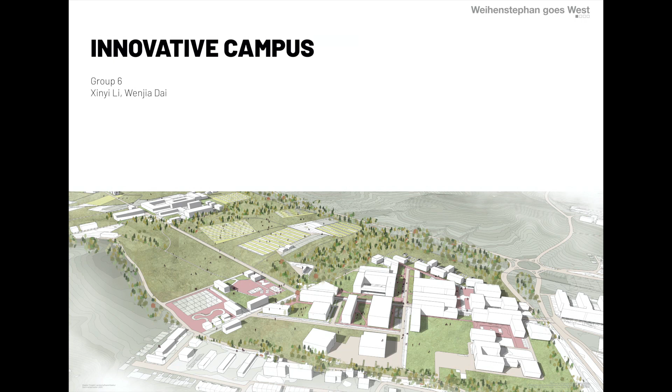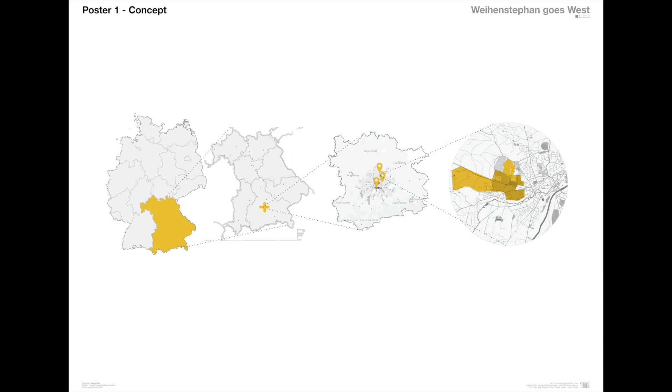The first part is concept. The site is our Weihenstephan campus and its western expansion. Weihenstephan campus is located in the west part of Freising, at the connection between the dense urban settlement and the broad farmland.

Based on the user analysis, we found that direct users have a high demand for spaces for entertainment, creation, and collaboration, while residents nearby, as indirect users, only use the campus for taking a walk. They need more opportunities to get involved.

TUM is always eager to be an entrepreneurial university, so we want to create such a campus. It offers possibilities for all innovative activities. Innovation means to create something new.

Due to the special conditions including rich natural capital and the life science disciplines, the innovative project will be closely related to the landscape, agriculture, food production, etc. Students and residents will be able to share knowledge and collaborate in studios, workshops, greenhouses, and farmland.

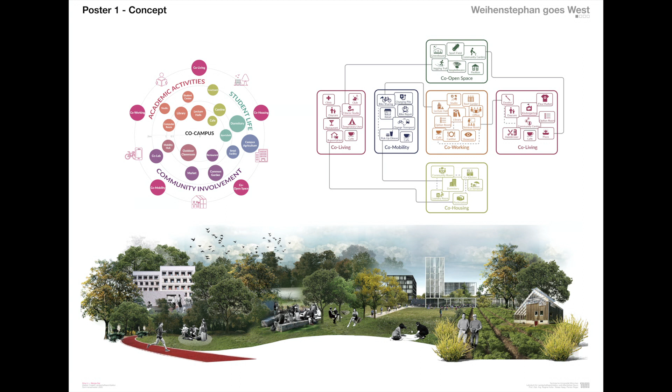We want to create a mode of common life where campus is not just a realm for teaching and researching, but also a vehicle for living and creating. Accommodation, commerce, mobility, cultivation, and expansion will be the new elements to bring the campus to life.

To the west of campus, Freising has a beautiful pastoral landscape. Along with the urban sprawl of campus, we want the agricultural landscape to remain preserved as a feature.

The mode of living on campus benefits from the hybrid of convenience of urban infrastructures and the beautiful natural countryside. The new area of the campus will accommodate a variety of educational activities while allowing people to enjoy an idyllic lifestyle.

Then comes to the landscape structure. First, the new west part is now a large area of farmland surrounded by natural areas. Second, we leave the middle part of the site unchanged to shape an open green corridor connecting the north and the south.

There is a creek between the site and the motorway on the north. It becomes a green belt going from west to east to link the new campus and the existing area.

Third, when the primary landscape structure is defined, the existing campus expands towards the west and the dormitory area goes to the east. The boundaries of construction areas are defined by the green fingers.

Three creeks can be identified on the site, going from south to north. We set the area around the creeks as nature reserves. You can see the green fingers in the bird's eye view.

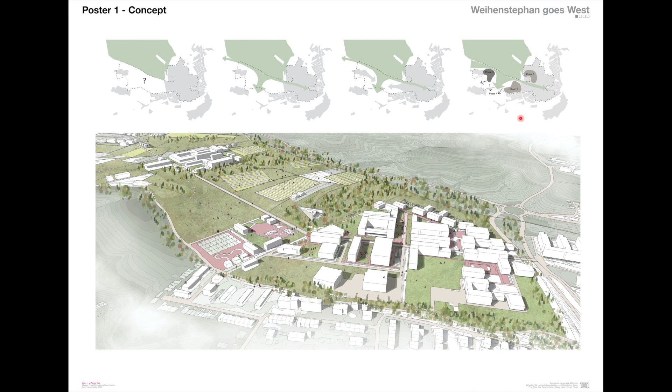Finally, the construction period can be split into 3 phases. Then we are going to see the master plan of our design area. This is our second poster, including analysis maps, a 1 to 5,000 master plan, and 2 sections.

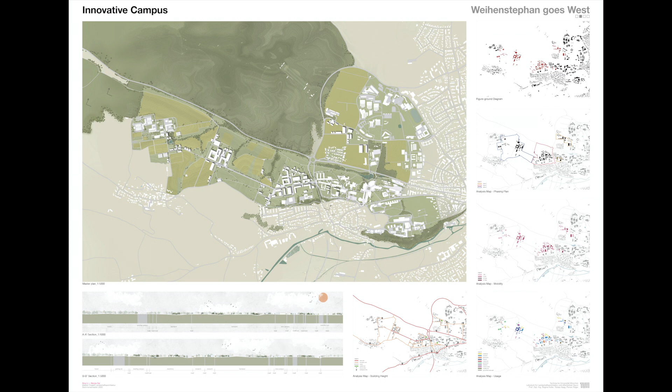Here is a figure ground diagram. The red buildings are the new buildings.

Showing the mobility map, the red lines represent the main roads. We extend a new main road from the existing campus area to the west, which is 10 meters wide. The orange lines are the secondary roads, which are 6 meters wide.

We build up 3 mobility hubs, which are green in this map. It offers people diverse possibilities to park different vehicles and aims to create a prioritized pedestrian and cyclist traffic system.

The existing large parking lots in the campus, which are not used with high frequency, will be converted to functional open spaces. In addition, 3 new bus stops appear along our main road.

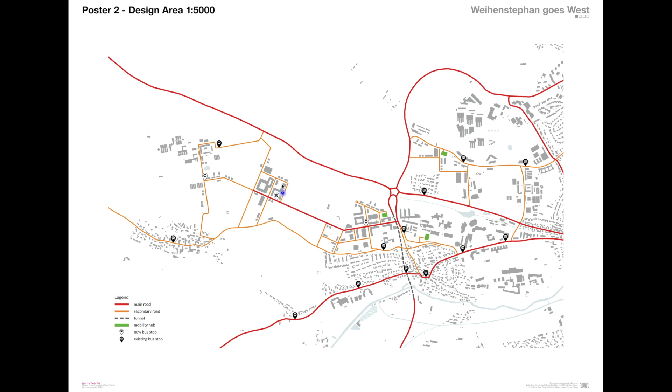The building height map shows that the buildings near the central green area are lower and have a smaller scale than the buildings away from parks and farmlands.

This is the usage map. In the northern part, the buildings near the forest are dormitories, and there will be some buildings for research and education, which are in dark blue and light blue.

In this new construction area, most buildings serve for education, and the ones along the main road will have retail on the ground floor. The buildings near the farmland will serve as dormitories.

These pink buildings will provide common uses, like co-working spaces, studios, or some function rooms for all the users. The area near the dormitory area will provide more farmland for research.

More greenhouses will also be built here, along with dormitories for students. The purple ones will be a space for exhibitions or forums on the campus.

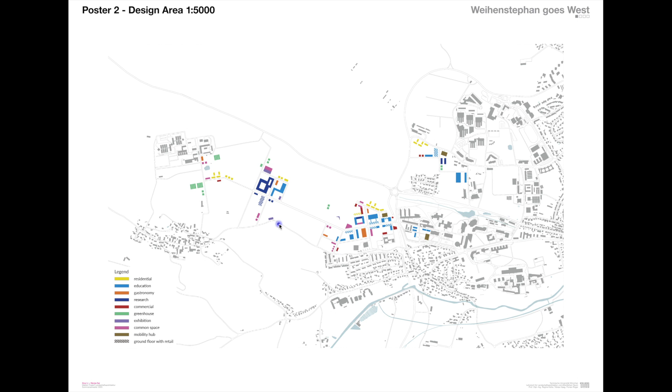Here is our master plan and the sections. It shows our concept that 3 fingers are extended into our campus.

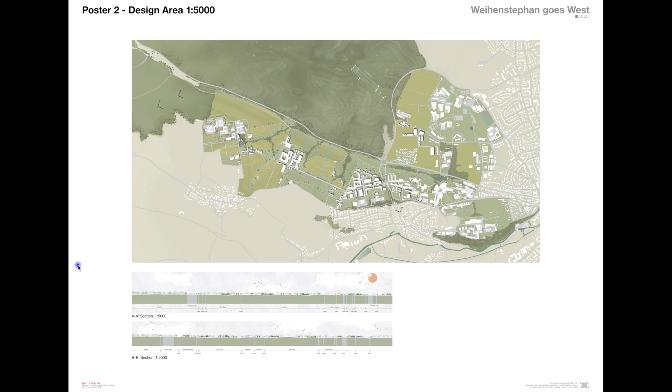The third part is our focus area. This is our third poster, including the 1-1000 plan and sections, an axonometry and a street section. We choose this part to be our focus area because of its diverse architectural uses and typologies.

The buildings in the center are much higher. Some dormitories are built in the north near the nature. Fields near the dormitory area are designed as community gardens, which will be an innovative platform for students and the residents. Besides, there is also another community garden in the south, which is open for everyone, and it's near the residential parts. These small-scale buildings will be markets, restaurants, common spaces, and so on.

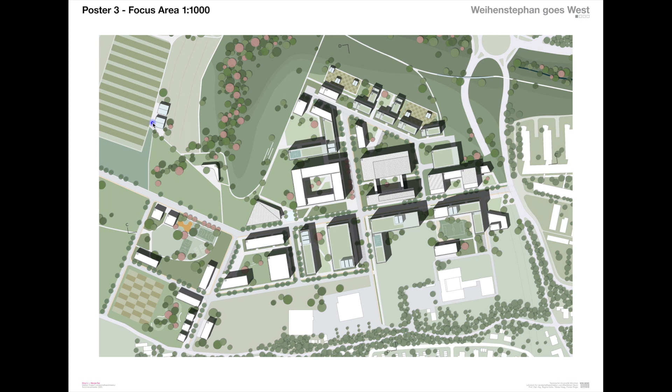We also create some paths from the construction area to the green finger, which will improve the accessibility to nature, achieving the purpose to integrate nature with campus life.

In this axonometry, we can clearly see that buildings along the main road makes the uses of education, research, and partnership, and they will have retail on the ground floor.

There is a new dining hall for students and teaching staff. The mobility hub serves the whole area. However, we still set aside some parking spaces for temporary parking.

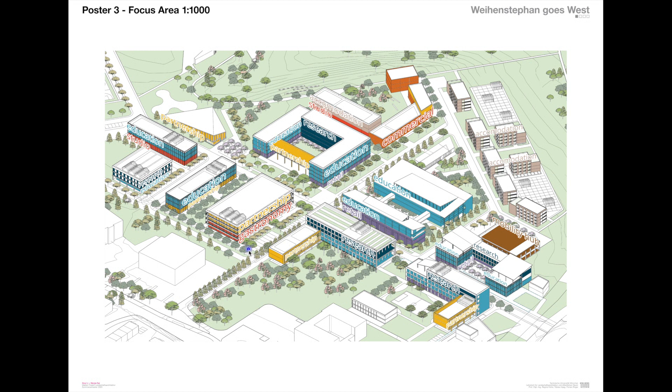These 2 sections show the gradient changes of building height, architectural volumes, and typologies from east to west and from north to south. People could enjoy the convenience of urban life as well as the benefits from an idyllic life, such as a quiet living environment and fresh air.

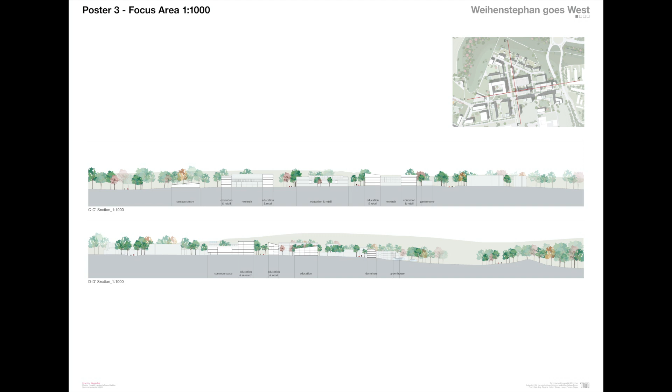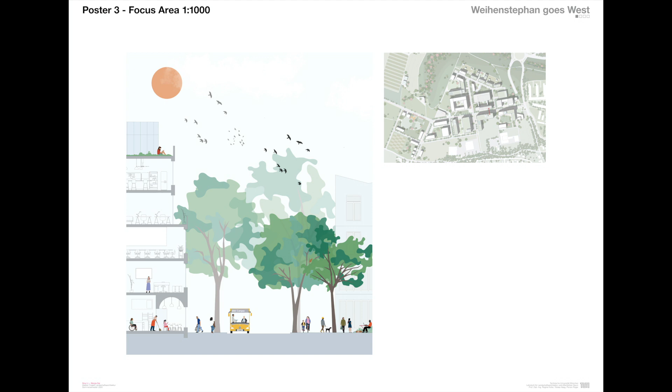The fourth part is about detail. I will present it in a more narrative way.

The section perspective shows the mixed-use pattern in single buildings. The ground floor is public, with some shops or cafe facing the street. It also has service spaces, public meeting rooms, or collaboration spaces. The upper floors are mostly education or research labs or offices.

Most buildings have terraces or roof gardens, providing open-air public spaces on the top. Imagine it. You climb onto the terrace with your friends after a lecture, drink a beer, and have an overlook of the charming countryside.

Or when you get stuck in the research, put down your work, go to the roof garden to see some flowers, and forget all your worries.

The dormitory area on the right is close to academic area, making it convenient to go to courses or discuss with fellows. It is also independent to keep quiet enough.

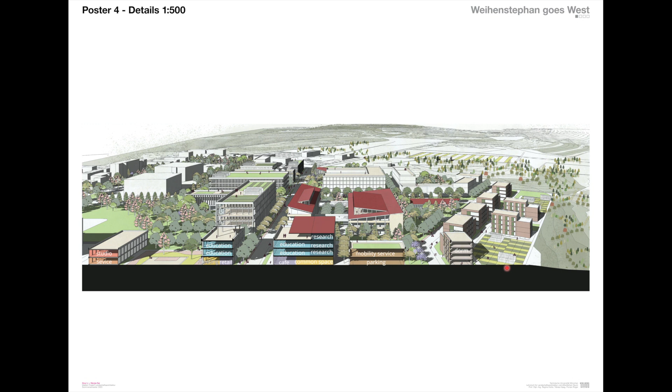This is the image of innovative life in education areas. There is a small square with outdoor furniture outside the studios on the ground floor. Here students can test or display their large devices and installations.

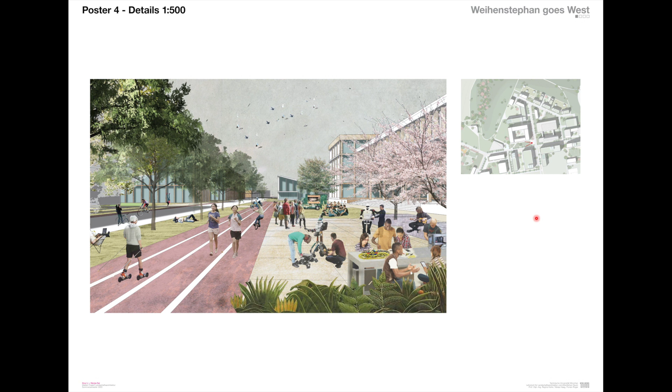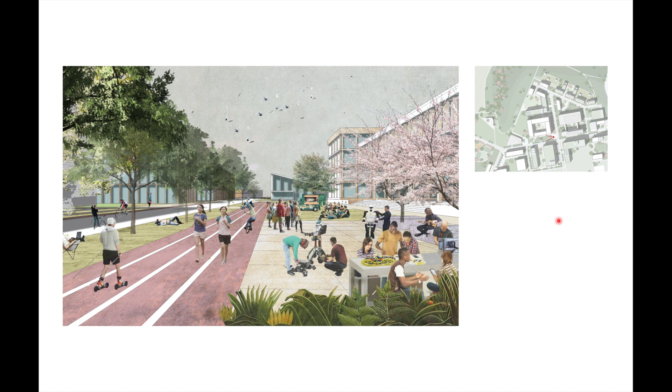Users can also relax on the lawn, have lunch, buy a coffee from the food vehicle, and take a sunbath. Vehicular traffic is separated from pedestrian traffic. On the continuous and wide pedestrian area, you can walk, run, or even ride a unicycle safely.

This shows a visionary in the community garden in the dormitory area. The land is divided into small parcels and allocated to students. They can choose whatever they want to grow.

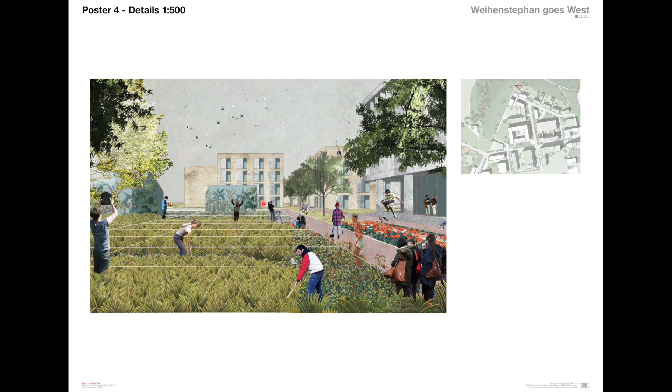There are also greenhouses for special plants and flowers. At the edge of the fields, there is a public hub where the students can hold parties or do cooperate tasks. This detailed plan with ground floor shows the spatial relationship between indoor and outdoor spaces and how densified area transitions to the nature reserves.